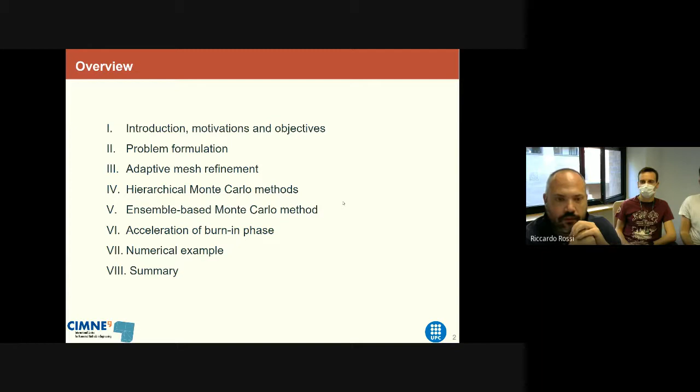We will start by introducing the motivation and objectives of the ExaQUte project. We will discuss briefly the problem formulation, speak about adaptive mesh refinement and how that is related to hierarchical Monte Carlo methods. Then we will step up a bit in describing our proposal to use ensembles in accelerating the standard Monte Carlo method, and discuss briefly what is the burn-in phase, then move to the numerical examples.

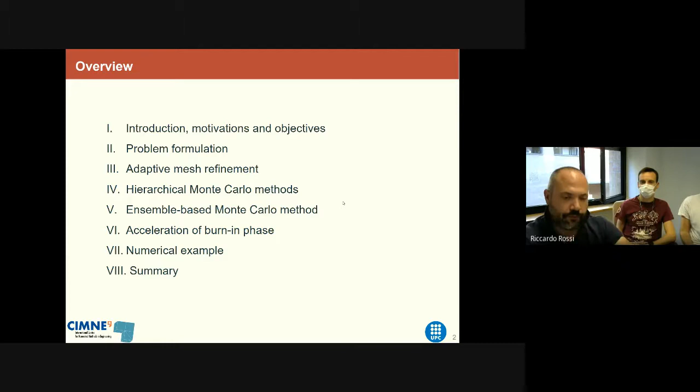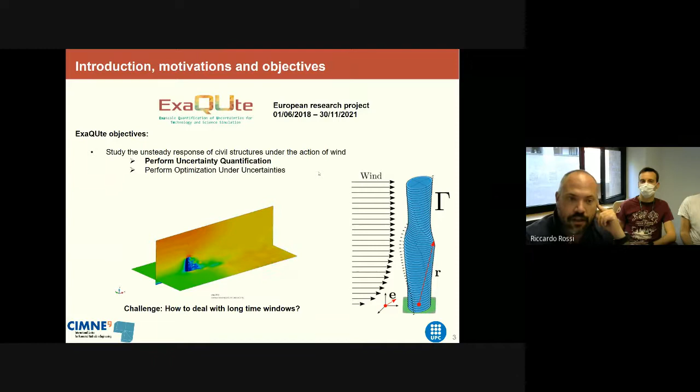Now, what were the objectives of ExaQUte? We wanted to perform uncertainty quantification, to essentially be able to give an estimate about the error bars in our results. And also we wanted to do optimization under uncertainties, combining a lot of state-of-the-art technologies.

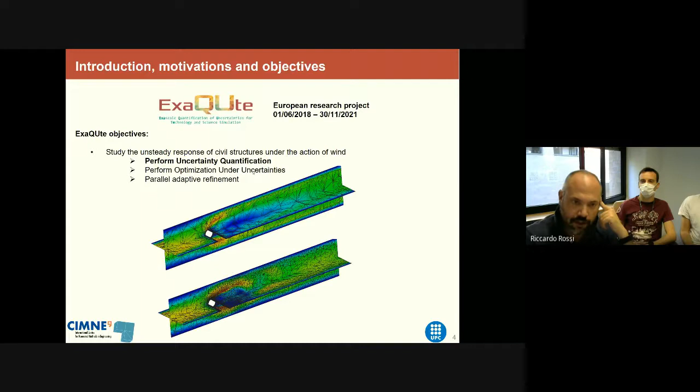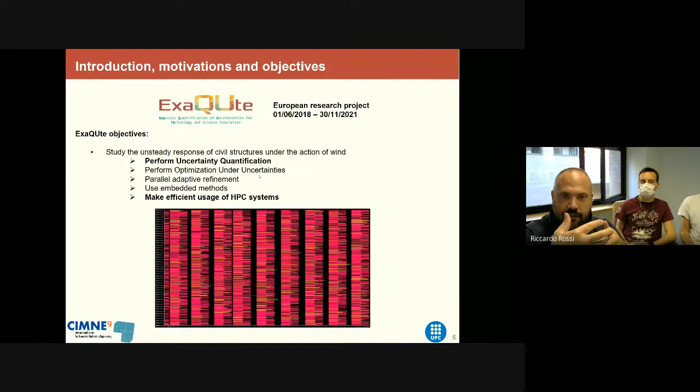Among those state-of-the-art technologies, there was in particular parallel adaptive refinement, which will be the topic of the talk presented by Andrea. We also wanted to use embedded methods and make efficient usage of HPC systems. I will try to touch on some of these, at least in the sense in which we were addressing them.

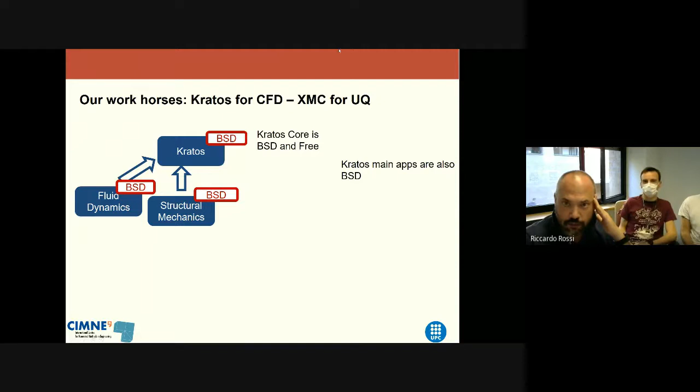At CIMNE and UPC, our workhorse was Kratos for the CFD part and XMC for the UQ part. Kratos had a structure that was flexible enough to eventually open and close applications so that it could be used in other projects.

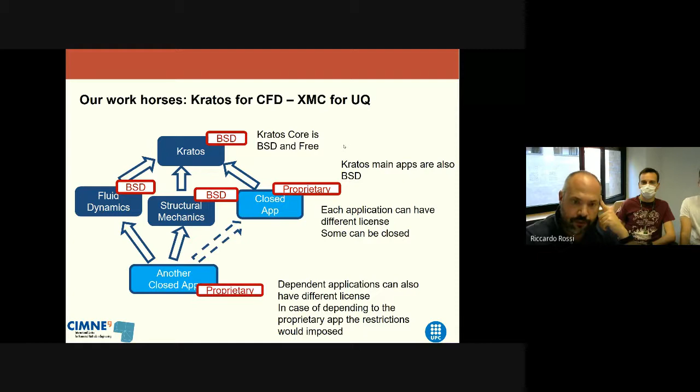Now, what is the idea of the formulation? Let's say we have a given quantity of interest of a problem that is time varying, and this quantity of interest depends on a number of uncertain parameters. What we want is to estimate Q bar, which is essentially the limit for t tending to infinity of the ensemble average of Q.

We need multiple realizations to evaluate their effect, and this is about, for example, the stochastic boundary conditions.

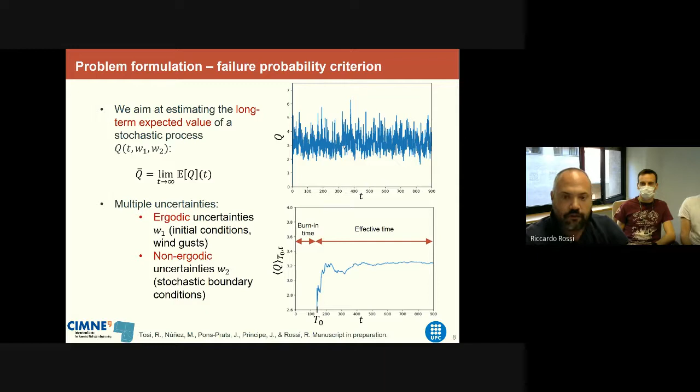What we shall see is that we will have to deal with signals as the ones shown here at the top, and out of those signals we will have to take time averages, moving time averages. So what we will have is that the time averages will change over time.

Actually, our goal would be to get rid of this time-changing behavior as much as possible, but we will also have some initial effects which will oblige us to discard some simulation time at the very beginning, which will imply identifying an initial time before which we want to discard everything.

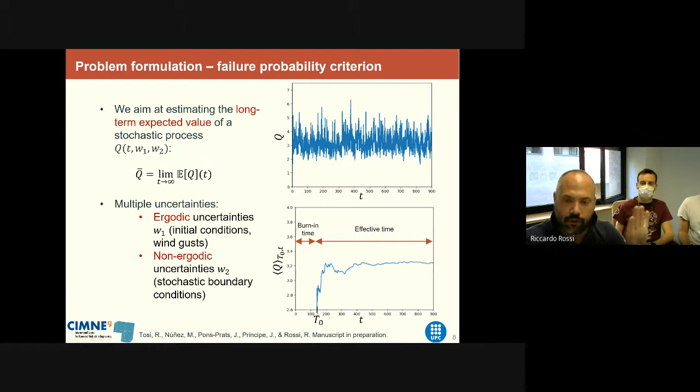The point is that in doing this, we will have to deal with a number of errors or uncertainties in our simulation. In particular, what we will need to recognize is that we'll have some errors that come out of discretization, the fact that we are obliged to use a mesh with finite resolution. That's what we shall call the discretization error.

We'll have some effects that are related to an initialization bias, and then we will also have some statistical error. In the following, we should discuss how we address the different components of the error.

And the kind of physics that we want to deal with is that of wind engineering. In particular, at least for this presentation, what I'm going to do is focus on the CAARC building, which is subjected to stochastic boundary conditions. The geometry of the building is pretty simple.

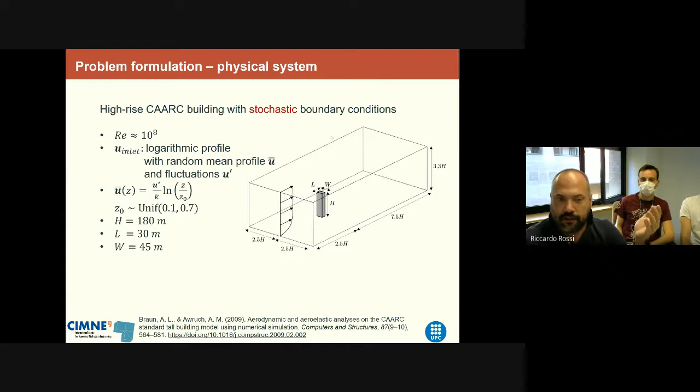Now, from a physical point of view, the problem of wind is a problem that has been studied a lot in the civil engineering community due to its obvious importance. In particular, there are some findings that are common that must be cited, and we should recognize that there exist some time scales in meteorological effects.

Once one picks a site, on that position on the Earth, we will have phenomena that happen with different return periods. If one studies statistically the energy associated to the events that happen at that site, measuring over a period of years, one can recognize that there exist two peaks.

One peak is related to macrometeorological events, that is, seasonal events. The other peak is related to events which are much more violent but also much shorter in time, which are micrometeorological events—essentially storms.

From the point of view of building design, this is the thing we are interested in, and this is what characterizes the energy distribution that needs to be taken into account when one wants to design a building to resist a storm.

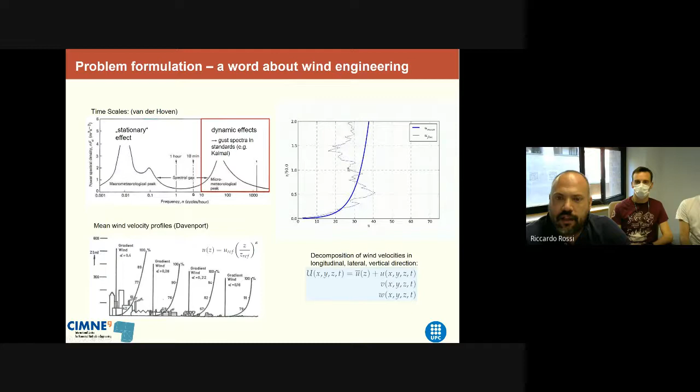The long story short is the following: you choose a site, the site tells you what the shape is, and on top of that you generate a history of velocities which take into account this wind distribution.

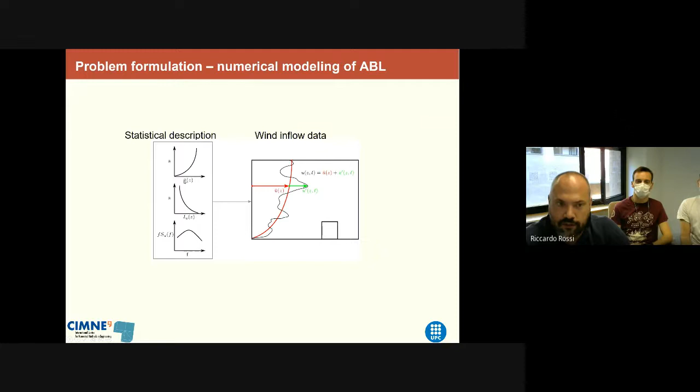In short, it is something like this. We have different properties that describe what needs to be met—some of those statistics, like a power spectra or an intensity of turbulence, others are stationary, and overall this describes the shape of the inlet.

We want to do this with a single adaptation over the entire history, because otherwise the cost of meshing would be much higher than the cost of simulating the fluid. This means we will have to design...

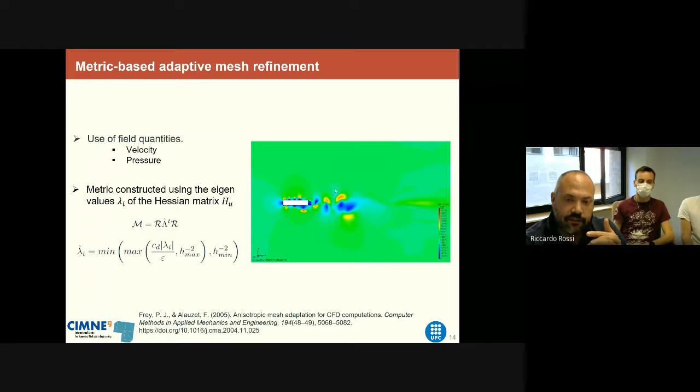...a distribution of sizes within the domain, which we will do by prescribing over the entire volume the definition of a matrix that is defined node by node. This matrix is estimated on the basis of velocity and pressure.

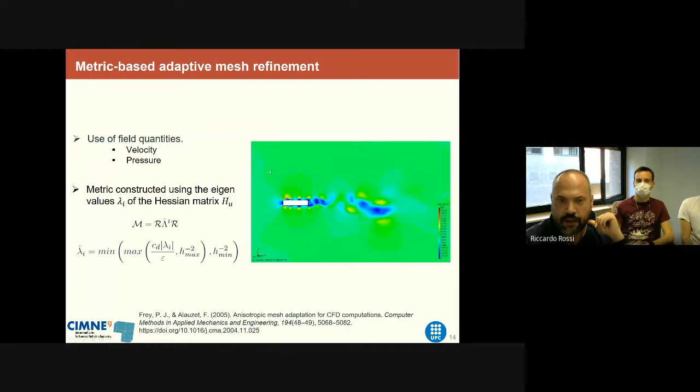There exist many different possibilities for doing this, and we spent substantial time understanding which one was the best option. In particular, we could either first take a steady state, do an unsteady simulation, perform a posteriori time averaging, and then out of the time-averaged solution estimate an error and refine accordingly—which would lead, for example, to the solutions we see here.

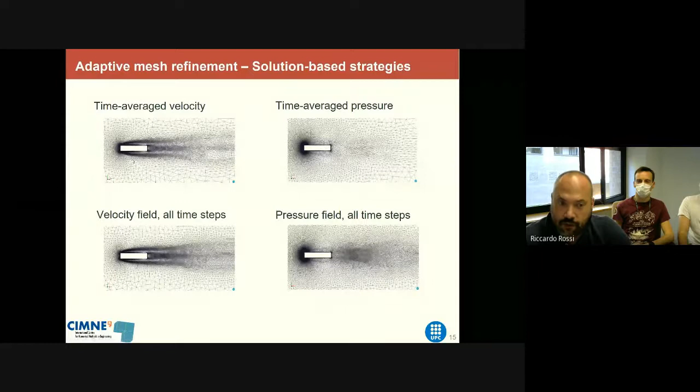Or we could estimate an error at every time step, and average the error afterwards. This, for example, gives rise to the solution here, which is, of course, not obvious—also the number of elements is not the same. Also, we have to choose whether to estimate our error based on velocities or on pressures.

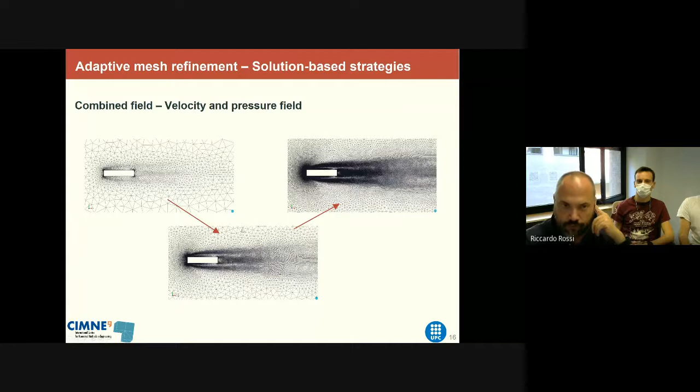And that's also something that we've been exploring at length. But in particular, it was also possible to combine the error estimation given by the pressure and by the velocity. I'm not sure if this was the pressure, but it was giving us this information, and we could enrich to further include where it was smaller, where the metric required by the velocity was tighter, we could use that—so the tightest of the two. This was allowing us to combine the two error estimation procedures.

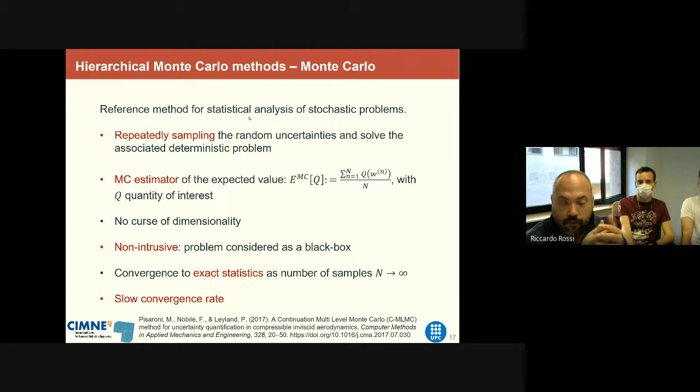Now, in order to do a UQ, we need to use this technology together with hierarchical Monte Carlo methods. So here there are options. The first option is to use Monte Carlo, which essentially boils down to repeatedly sampling the phenomena we're interested in, in order to obtain an estimate of the expected value of the quantity of interest by a simple formula like the one we have here.

This method is, of course, the simplest thing one can do. So I'm taking out the hierarchical here—I'm just speaking of Monte Carlo. This is non-intrusive, and eventually it will converge to the exact statistics. The problem is that it will do so in a very slow way.

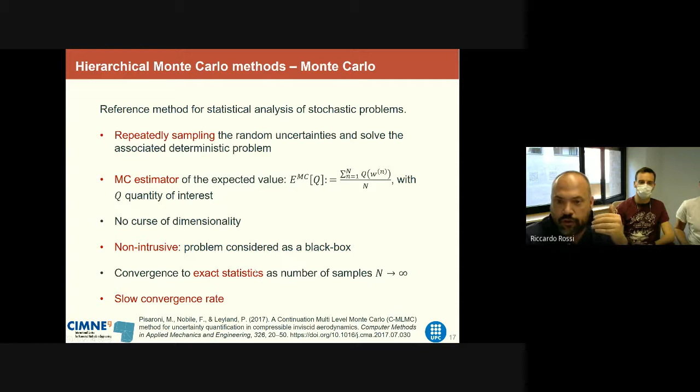Or we could move to more sophisticated methods, and that was our initial intention in the project. In particular, what we wanted to do was employ the multi-level Monte Carlo method. Now, explaining how this works in detail is beyond me, but essentially this boils down to constructing a better estimate by summing the difference of solutions at different levels.

We need to construct a hierarchy of levels with different resolutions for each level, so that the statistical error can be diminished by looking into the levels with low accuracy, but of which we have many, while the discretization error can be assessed by taking a look at the fewer but more accurate and more expensive simulations performed at the high accuracy levels.

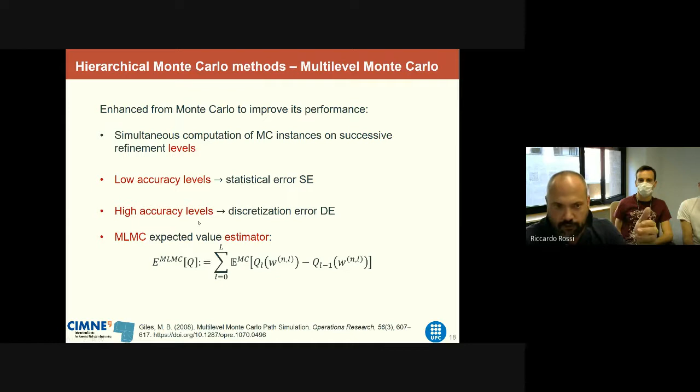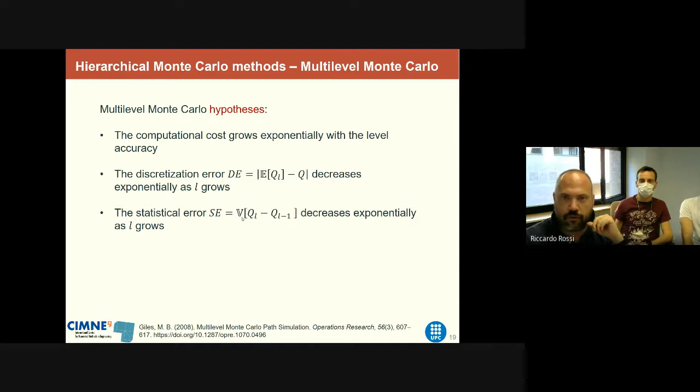Now, unfortunately, the multi-level Monte Carlo technique relies on a number of assumptions, and those assumptions needed to be verified. In particular, there needed to be—well, that the computational cost grows exponentially. Well, this is true. However, that the discretization error goes to zero sufficiently fast as the level is refined, or that the statistical error decreases exponentially for the same problem—well, this is not true. At least we found out it was not true for the problems and for the discretization we were able to use in this simulation. So we spent some time working on this.

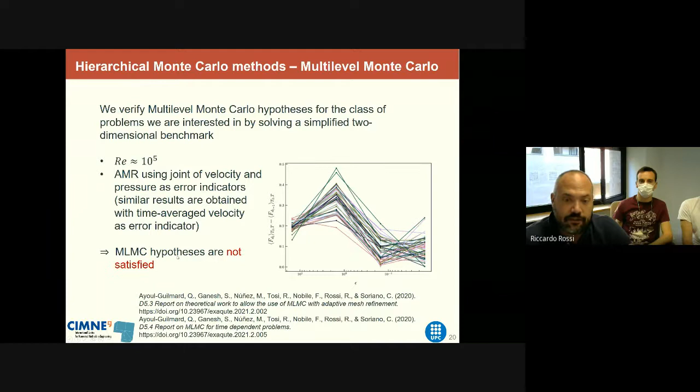This is detailed in the reports that we presented together with EPFL. But essentially, we saw that when we were using our mesh refinement technologies in the context of a high Reynolds flow, we were not able to satisfy the multi-level Monte Carlo hypothesis, which led us to looking for alternatives.

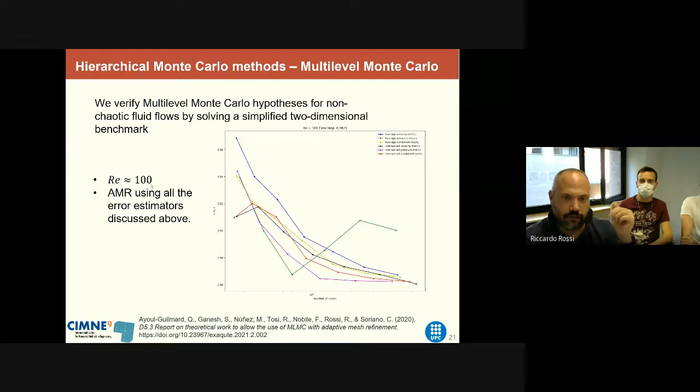Of course, if the Reynolds number was smaller, things were looking much better. However, this was not something we could afford because it was of no engineering interest. Now, given this difficulty, we were looking for ways to accelerate our simulations.

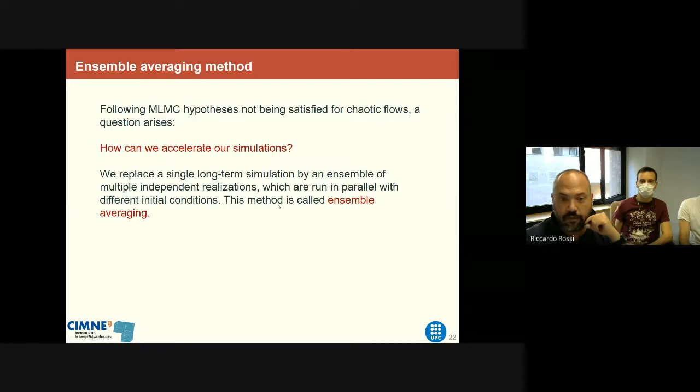In particular, we understood that much of our cost was related to the need of performing very long time histories. We addressed this by taking advantage of ensemble averaging. There is quite a lot of literature about how this is done. In particular, we can take advantage of ensemble averaging either by considering independent realizations or by using more intrusive methods in which different realizations are considered at once by modifying the solver.

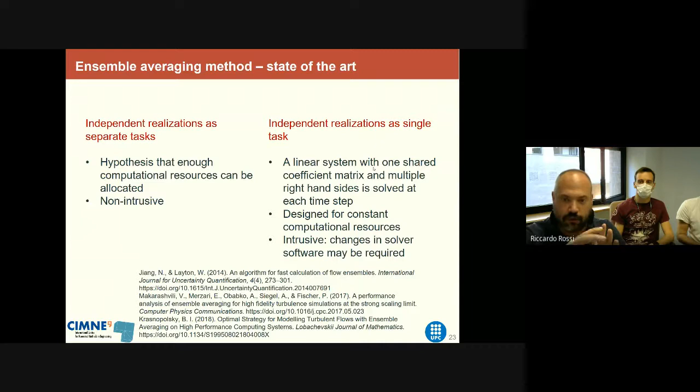In our case, the first option was better, and essentially we focused on the use of those techniques for cases in which ergodicity was valid.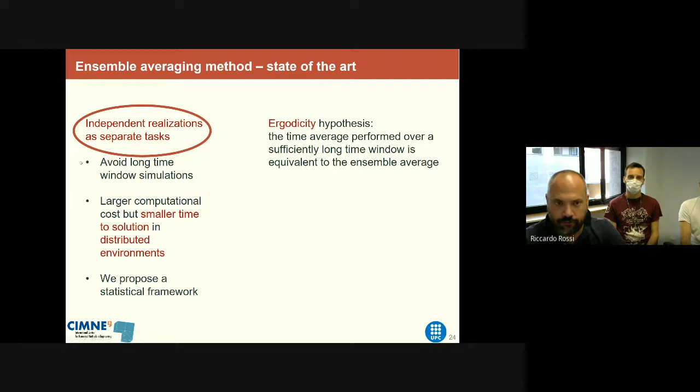Essentially, our goal was—even though we could obtain minimization of the statistical error associated to some of the quantities we were considering by running a very long simulation—instead, we prefer to run a lot of shorter simulations, so that this would allow us to get a solution in a shorter human time, even though at the price of using a lot of computational resources. But this way we can make use of a supercomputer.

The idea is that instead of having a long signal, we take shorter signals and then glue them together in order to do the statistics. So our estimation could be computed this way, where Q and M is the history of the time average between T and T0 of the quantity of interest.

But for the given scenario we are considering, we have to consider parameters that depend on ergodic quantities and non-ergodic quantities. So we will have M realizations for the quantities for which ergodicity could be used, and N realizations for quantities for which ergodicity could not be used.

You remember, one of these phenomena are like gustiness or vortex separation, and the other one is, for example, different boundary conditions. What we did is that we studied, or at least attempted to develop a mathematical model for this.

In particular, this quantity could be divided into components. Let's say this Q and M could be divided in components, one leading to an initialization bias, essentially taking Q and M as divided into A and M plus S and M, where A and M describes an initial transient perturbation, and S represents a more steady state contribution.

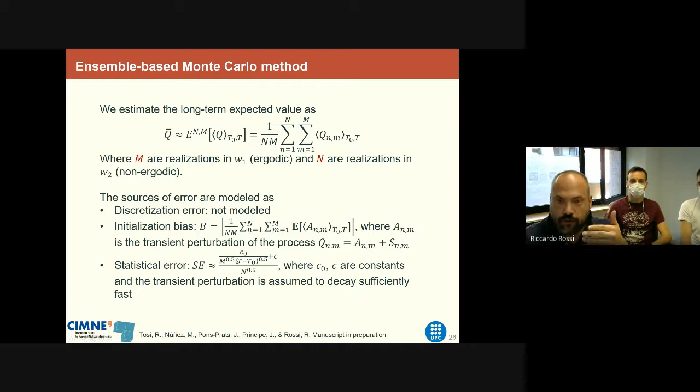Essentially we'll have that we can make two parts for which ergodicity is valid by changing M, but we will still need to increase the number of N to account for parts for which ergodicity was not a valid assumption. Still, this is useful in order to reduce the computational time for the problems we're interested in.

We studied the effect of the initial conditions in order to reduce the initial bias and to reduce the time that had to be thrown out at the very beginning.

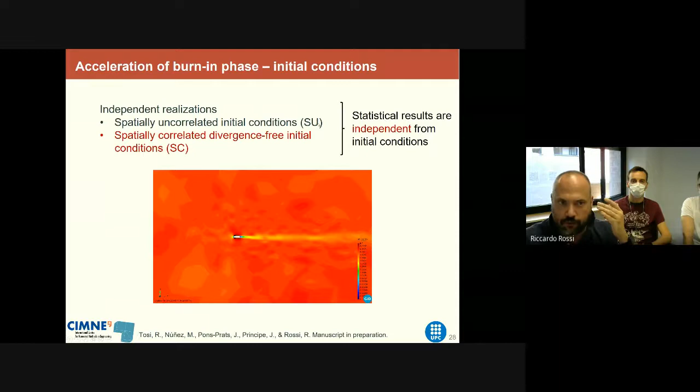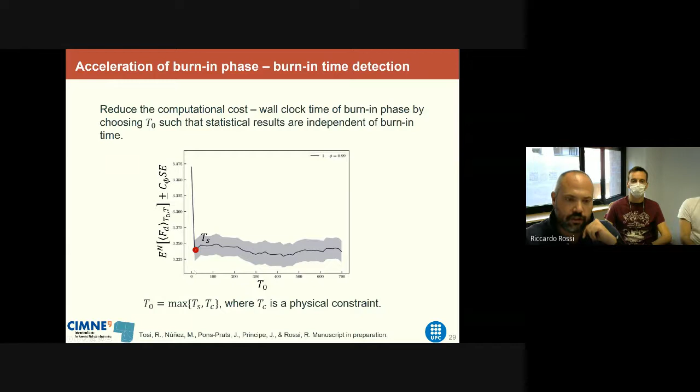We consider the use of spatially uncorrelated or correlated initial disturbances to the flow to trigger a different solution to develop. We demonstrated that the results we were obtaining were independent, from a statistical point of view, of the initial conditions applied at the very beginning. This allowed us to reduce the computational cost also by reducing the initial time.

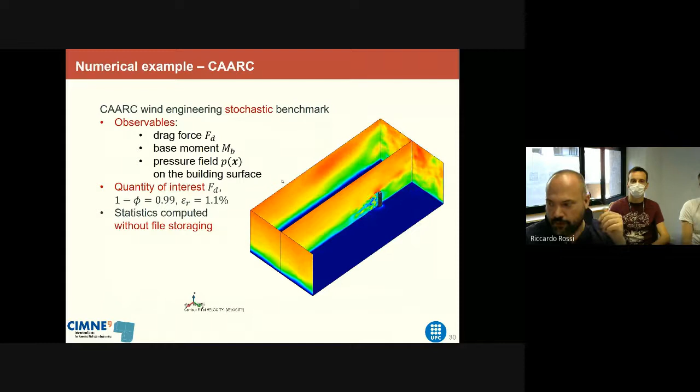From the point of view of the numerical example, this technique was used in application to the CAARC building, which is one of our demo examples. For the CAARC building, we did a lot of test cases.

In particular, we had the possibility of using different time windows, and to estimate a given quantity of interest, particularly the statistical error, for different values of the time length considered, or for different number of realizations.

Essentially this allows us to verify that the estimation we found was correct by doing a fitting of our results to the results that have to be considered.

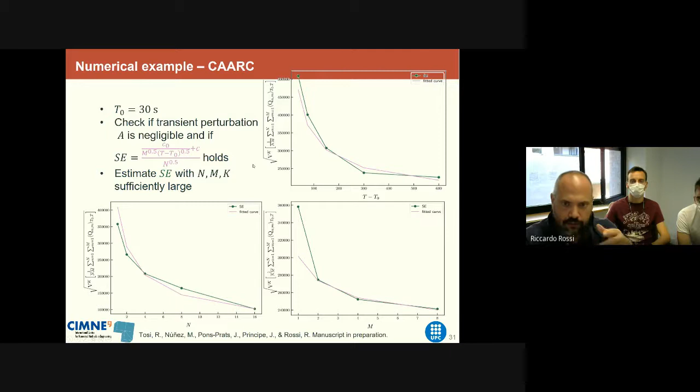The essential method is that by using this technique, playing with the number of N and M, we explored a lot of different options, and we could reduce the human time to solution by a factor of almost 10 by essentially making use of or exploiting parallelism, allowing a lot of simulations to be run in parallel on large supercomputers.

We normally consider that the total simulation time, M times the time window, was of the order of 600 seconds, because the use of a 600 second or 10 minute window is very standard in the engineering community, as it corresponds to a peak micrometeorological event when strong winds are considered. So that's a design condition.

But this could also be relaxed, and this could lead to even larger gains.

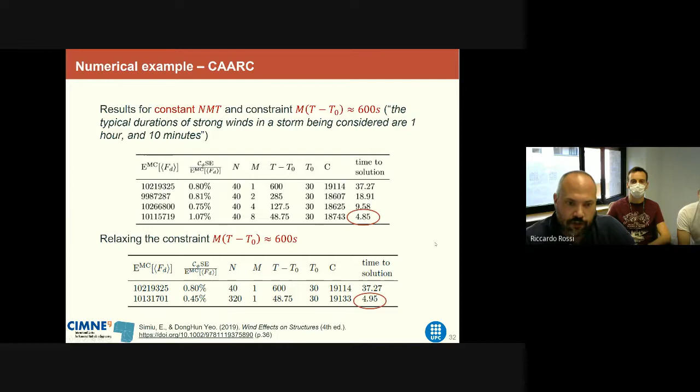There are some results here, which will be detailed in the reports. I won't discuss the tables much, but essentially we obtain the same results at a different cost, and it's possible to use a different quantity at different stopping conditions or different quantities.

For example, it's possible to look at the conditional value at risk, which is an interesting quantity from an engineering point of view. We can estimate pretty well our expected value with a very low variation around it, but we can also estimate the range of fluctuations around this, which is of real engineering interest.

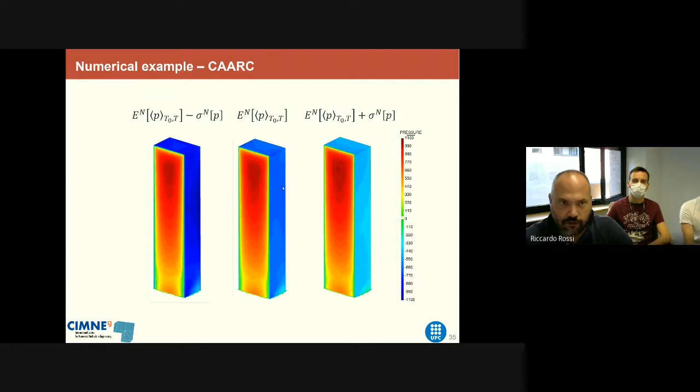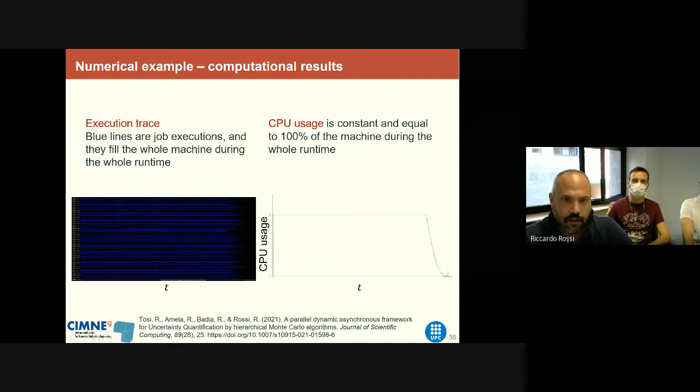And we can do this by keeping the machine we work on completely full, even though thousands of CPUs are being used at the same time. This has been one of the important goals of the presentation.

The software we use is Kratos and XMC - Kratos for the CFD, XMC for the UQ part - and all of this relies on the PyCOMPSs framework in order to spawn the tasks that need to be run. In summary, this is all.

We developed an open source CPU framework which can take advantage of HPC systems, integrating the FEM solver Kratos, the UQ framework XMC, and a remesher based on MMG and ParMMG - state of the art remeshers. It also takes advantage of a distributed programming model, COMPSs, or PyCOMPSs. We developed strategies to reduce as much as possible the burn-in time, and accomplished a speed up of around 10 at the same computational cost by combining all of those techniques.

And this brings us to the end of my talk, just in time.